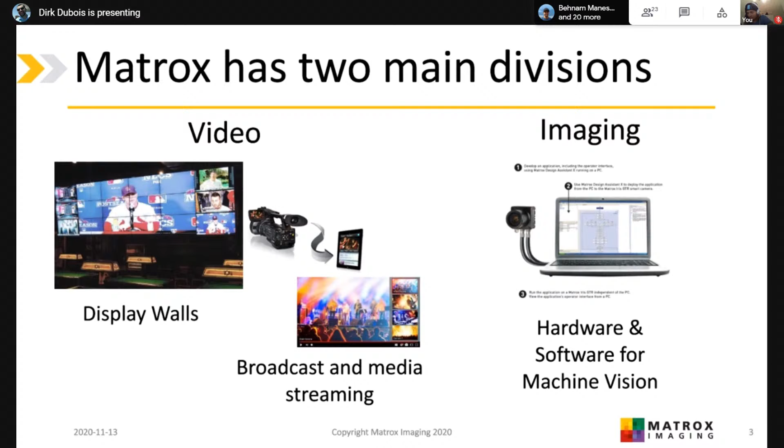But we're from imaging, so let's talk about imaging. In the imaging division, we do everything that's hardware and software for machine vision. So you have some sort of analysis you want to do of images, we provide the hardware and software to make that possible. And we've been around for about 40 years. Believe it or not, we're a Montreal-based company. Lorne Trottier is the founder of Matrox, along with Branko Matic. We're Montreal-based, all the engineering work and development and design gets done here, and most of the manufacturing gets done in Montreal too. We have our own assembly line, and we manufacture a lot of our hardware right here in Montreal.

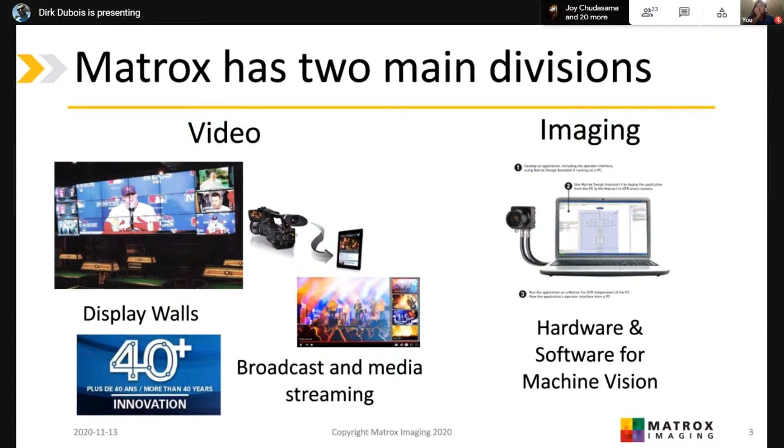So what is machine vision? Just to give you a bit of background, machine vision helps automate inspection. We want to do things like detect objects in images, we want to measure something in an image. Detection is great, you can find a piece, but once you've found a piece, often, if you want a robot to be able to come in and do something, you have to measure it, you have to know something about it. So how do we do that? Well, we provide this tool called MIL, the Matrox Imaging Library.

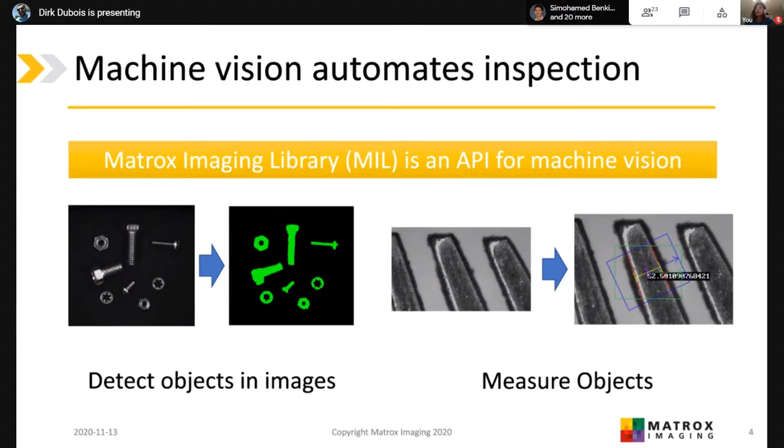It's a big API for machine vision. It's basically a software development kit that customers develop with, and they use it to code solutions for machine vision problems. And that's kind of what we develop. We've been doing that for a very long time. MIL's been around since 1991.

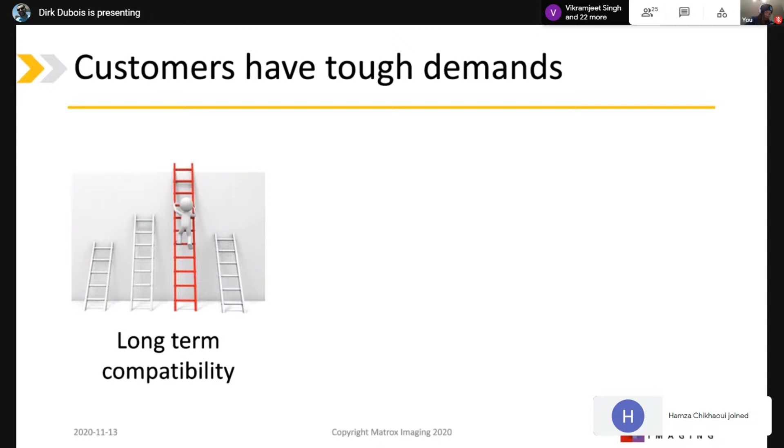So who are our customers, and what do they want? Well, they have really tough demands. Our customers really are looking for long-term compatibility, software that will be around and be stable and fulfill their needs for a long time, because they have these big projects that are going to be around for many, many years. So they need a lot of long-term compatibility.

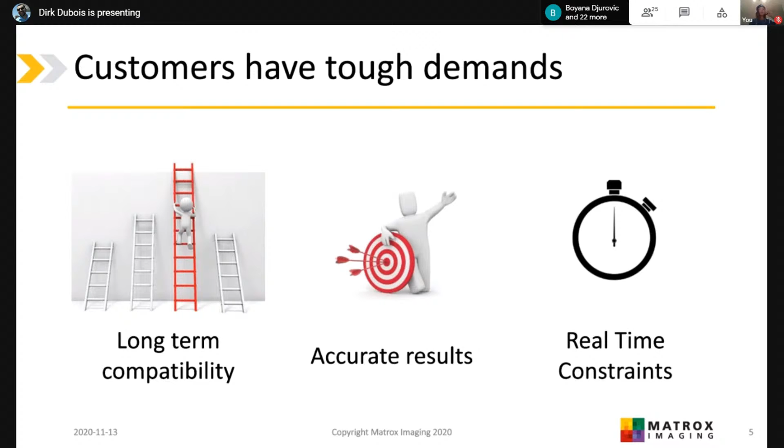They need really accurate results, because they have a factory floor somewhere where they're looking for parts, trying to pick up stuff. And everything that's missed is lost revenue, lost money. And they have real-time constraints. You have robots in the mix that have to pick and place parts, or some sort of biomedical scan. You have things that have to happen within a certain time delay.

Whoop, I feel like I missed a slide. Nope, there we go. Okay, cool.

And I will play this great video and hand it over to Behnam. Go ahead. Yeah, so some examples of what they explained to you.

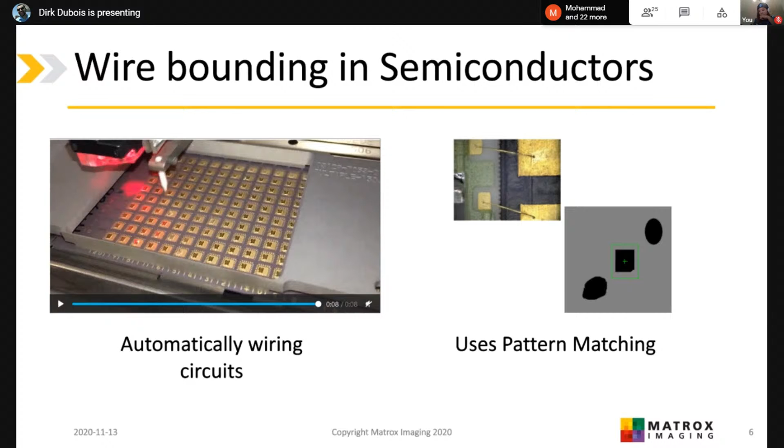Here you see a robot that is scanning the circuits and doing the wire bonding. There's a camera looking at the circuits, and it decides where to start and end the wiring. We have a tool called pattern matching, where you define a pattern, for example, the rectangular shape you see on the right side. Once you capture an image from the circuit, it searches the new image and locates that pattern. By knowing the location of that pattern, they can decide exactly where to start the wiring, and it gives you sub-pixel accuracy here, so it's pretty accurate.

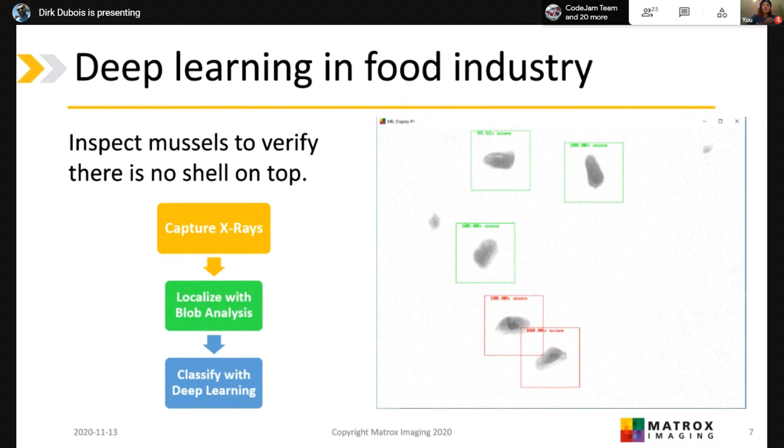To perform that, we first captured the images. Then we use our blob analysis tool, because our background is white and the objects are black, so we can easily distinguish the objects and locate them. Once we've located the objects, we crop them and train a deep learning neural network to learn the good and bad mussels and then predict them during production. We gained 98.6% accuracy after training the model, and our network actually works on CPU, with a prediction speed of about 1 millisecond per mussel or per box that you see.

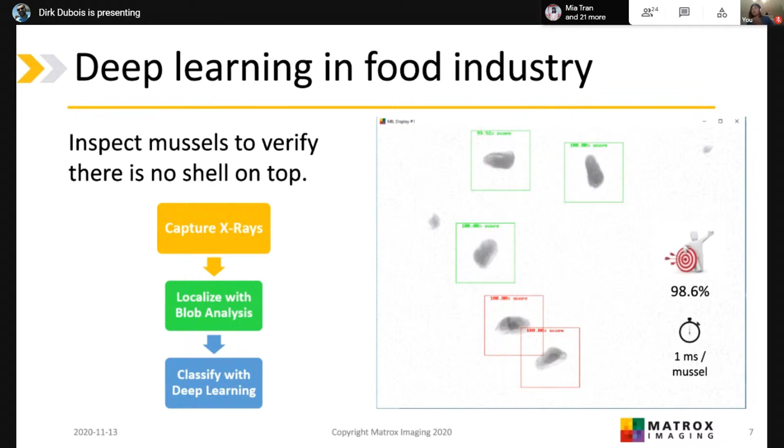Give it a second, it loads. Yeah, exactly. So here we're going to show you how to train one context to be able to learn and then predict if a mussel is good or bad.

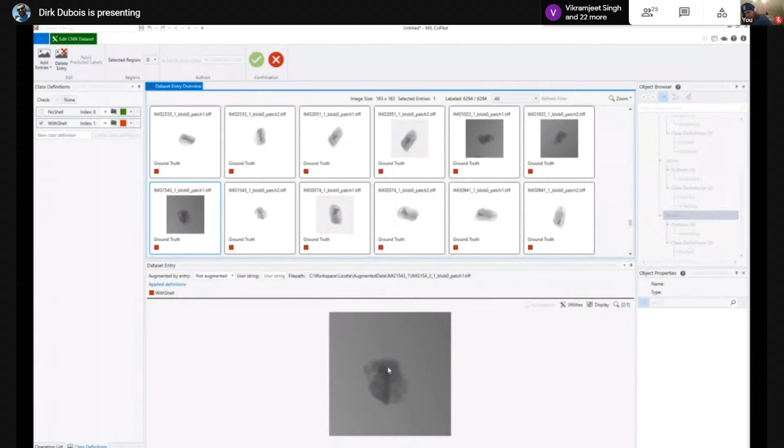We have a lot of images of the mussels labeled, so you see the green and red boxes under the images indicating if it's a good or bad image. We've also done augmentation, which is why you see some images darker, some brighter, with rotation and noise added, and smoothing, different types of operations to make the trained context more robust. You see this one has the darkest spot, so it's a bad one.

After we have the data set, we need to go and train our context. We give you parameters for training, like the learning rate and all of these. Here I'm changing the batch size because my GPU can handle it. Then you choose your context, your train set, and your dev set, and you just let it run easily.

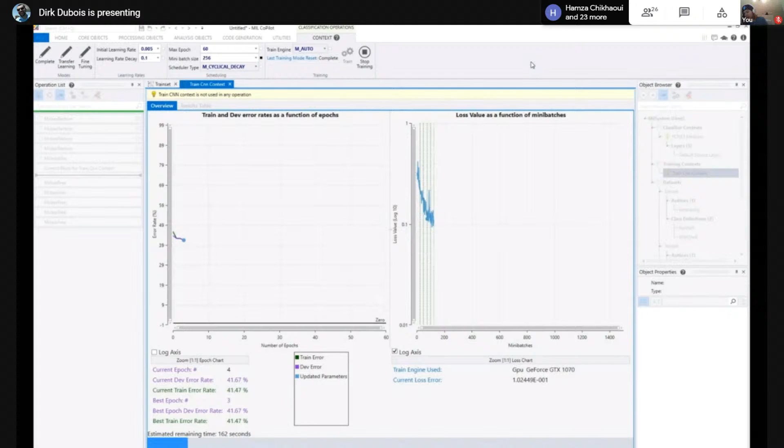Once you start the training, you will see two different plots, one on the left side and one on the right side. If you're familiar with deep learning, you know there is the loss value, which is our optimization error. That's what you see on the right side, and what we want to do is train our network to learn how to minimize this error.

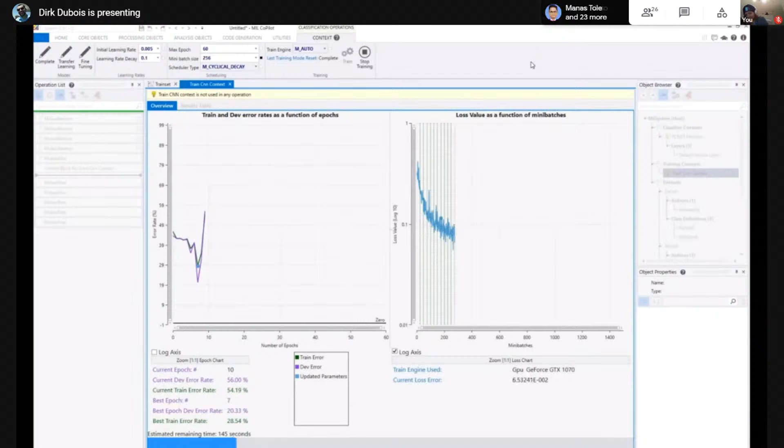What you see on the left side is the live feedback from the context to know if the train set and the dev set are giving us good results. So it's actually the error of our train set and dev set. We are choosing the best trained context during the epochs, so you don't need to worry about problems like overfitting that happen during training.

You can see here, for example, the current epoch is 15, but our best so far is 13, and it goes on over time. Since we are looking for accuracy of 90 to 100, or 95 to 100, it's better to switch to the logarithmic scale, so we have a better and more accurate visualization of how close we are to the goal. Since it takes time to train, we'll skip this part and go to where it's ready to use.

Yeah, there we go. Sorry about that.

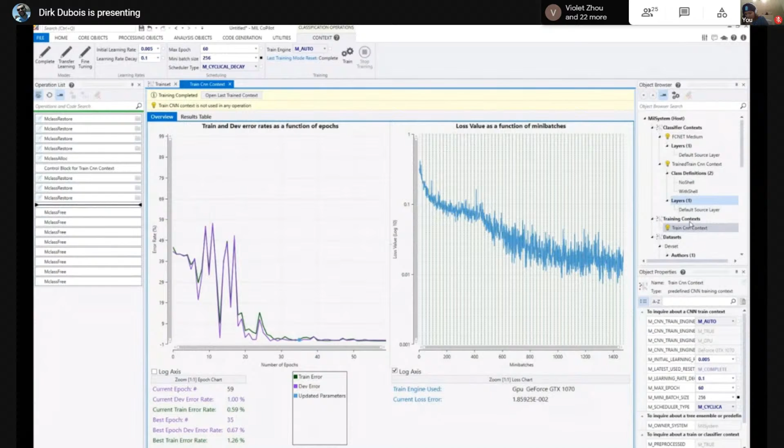No problem. So once the context is ready, we see that the slope is nice, starting high and going down. Then we have our test set, where we want to test if the trained context is good enough to deploy.

We predict on the test set using the trained context, and we have some analysis to do to see if it's good or bad. The tools we provide include some charts showing the ratio, and confusion matrices so you can see how it's behaving for each class.

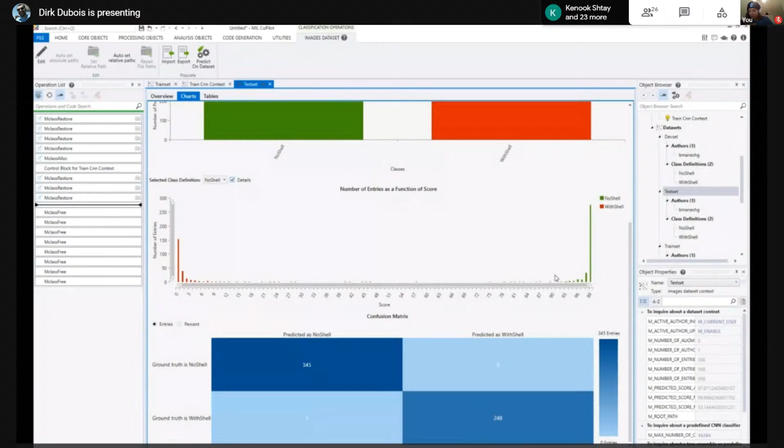There is also a chart showing the distribution of scores, like how many images were predicted with a score of 100%, how many with 90 to 50, or for other classes. You can get a quick visualization of the behavior.

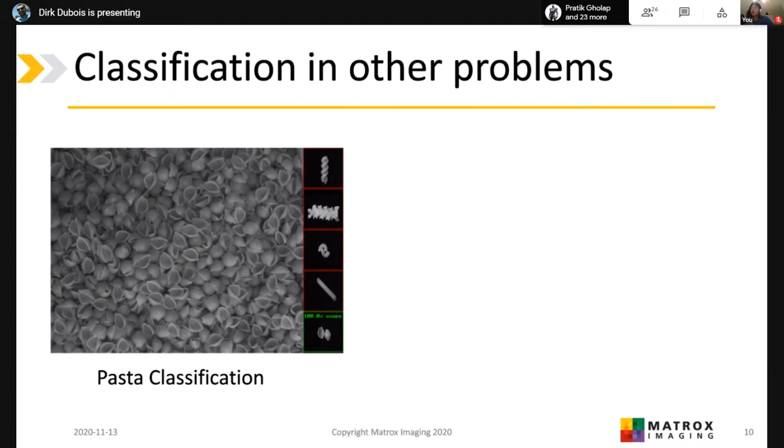We can also use deep learning for other problems. For example, pastas, once you look at them, don't have a specific pattern since they're mixing and always show a new pattern. So deep learning is a good tool to classify different types of pasta. Here we have images of pasta, and we can say which type we are looking at. The other example would be OCR.

We have a product with a string we want to read on top of it. We grab images and perform blob analysis again, just to locate the characters. Then we crop these characters and train a neural network to read them.

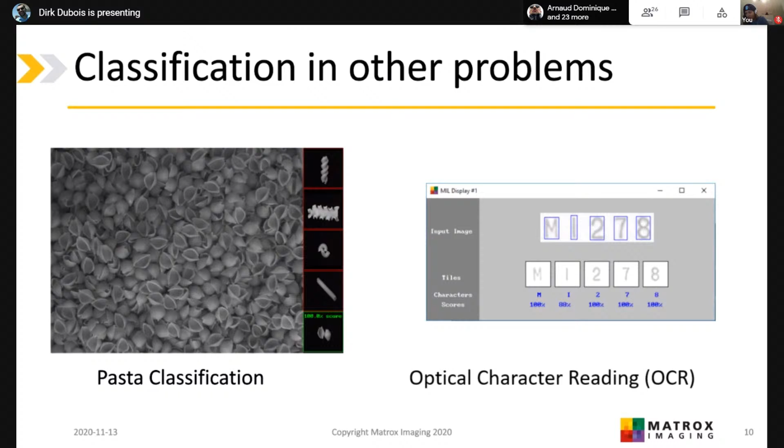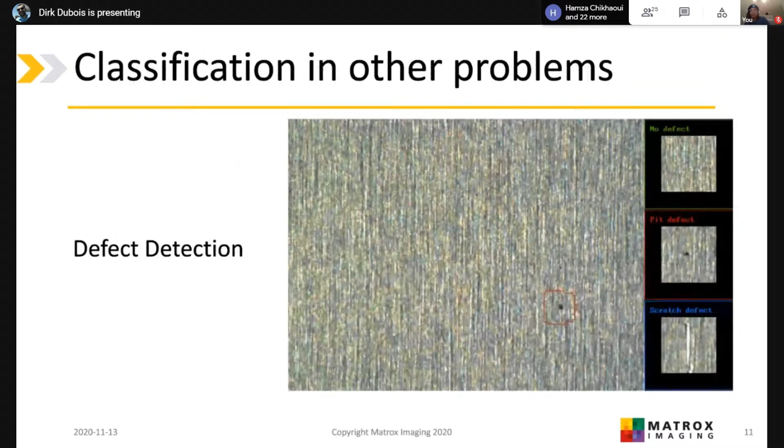The other example would be bin picking. What is bin picking? You have a bin full of products, and a robot that you want to take one product out of this bin and then place it into the right location.

For this purpose, we need a 3D camera, so we actually scan all the surface of the bin. We can also use the camera to capture a 3D model of the object. Once we define the model, we use our 3D matcher to match it with the best candidate. For example, in this video, the part on top is the best because it's closest to the camera, and the robot could easily grab it.

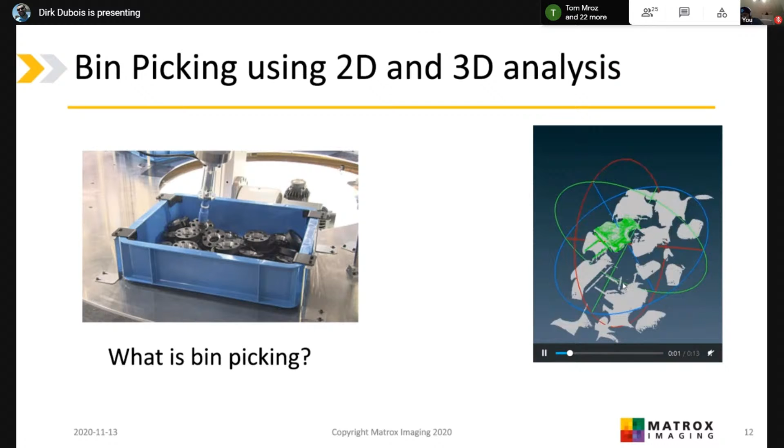So we've seen some examples now of how you can use classical vision and 3D analysis, and how you can use deep learning, and how we combine them together to solve a lot of customers' problems.

I think some of the caveats people think about when they think about machine vision today is that they think purely about deep learning models, about using exclusively deep learning to solve vision problems. The reality is, due to the high accuracy and performance requirements of customers, that's actually really tough to do with just deep learning models. There's this whole branch of classical machine vision that's been around since the 80s that has improved a lot over the years, which we can leverage to solve a lot of these problems.

And you saw that with the muscles example - we use blob analysis to help localize features we want to do some sort of deep learning with. So I guess what we're driving at is that we're really at the intersection of classic machine vision and deep learning, taking all the knowledge and industry expertise of classical machine vision and combining it to do other things.

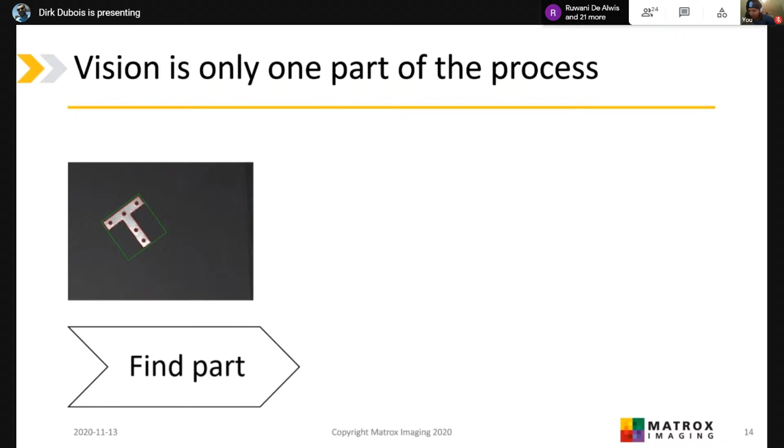So how do we actually meet high accuracy and performance requirements? Well, it's important to remember that vision's only one part of the process. You have an assembly line somewhere and you want to find a part. But once you find that part, you need to control a robot, which has to come in and move that part in some way. And then ultimately you have to assemble things - those parts are going to come together to make something.

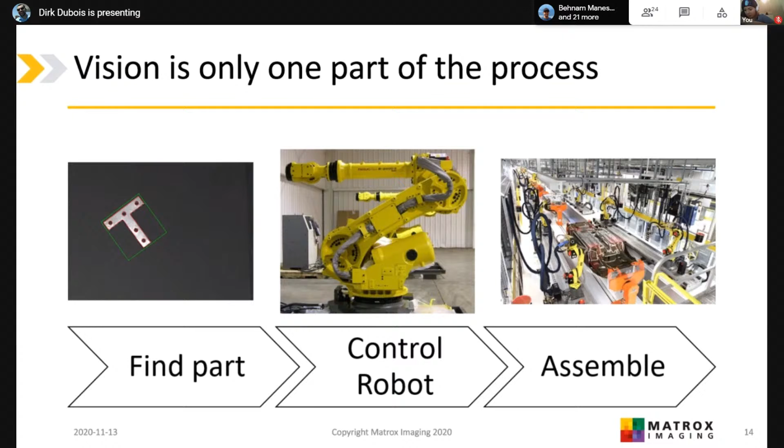The reality is that finding the part, that's the vision bit. Afterwards, you've got to control robots, assemble things, and all that takes a lot longer to do than finding the part. Finding the part is the algorithmic bit that we can really squeeze for time. So customers are really aware of that - every moment we save on vision, finding a part a few milliseconds or microseconds faster, means the robot has more time to do something, which means more parts processed, more things assembled. It's just a numbers game.

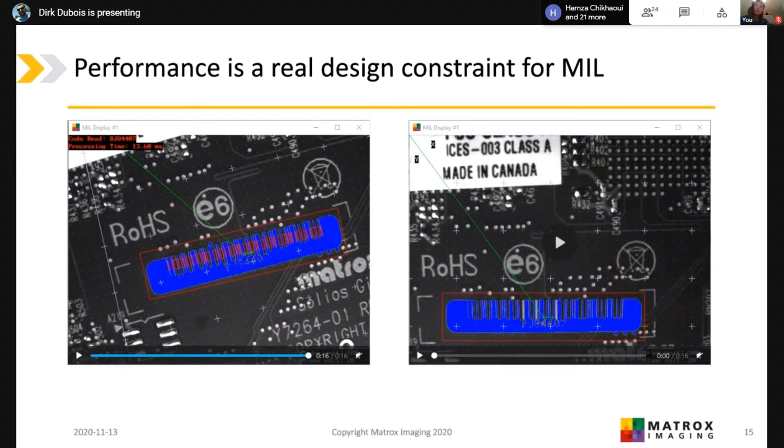So performance is a real design constraint when we make our library. On the left here we're doing barcode reading, which is really popular since lots of products have barcodes on them. In this example, it's a non-optimized standard run of barcode reading, and you can see from the timer in the upper left corner it takes something like 12, 13, 15 milliseconds to read it. You might say that's pretty good - if you're a user with a cell phone looking at a barcode, what's 12 milliseconds? But in an assembly context where vision's only part of it and you've got robots and things that have to come in, that's actually a really long time.

So what we do is have a whole optimization system where we optimize our algorithms and do the best we can to perform computations faster. The example on the right is the exact same example - the only difference is that we have our optimizations running. Now we can get things down to 2 or 3 milliseconds. And even that, I would say, for some MIL operations is very long. We have modules that run in the microsecond range.

These are running on general purpose computers, like ones you find at home, or even older equipment, because customers buy hardware from 10 years ago and they're still using it because it still works. So a lot of effort goes into making our algorithms work and trying to make them both accurate and performant.

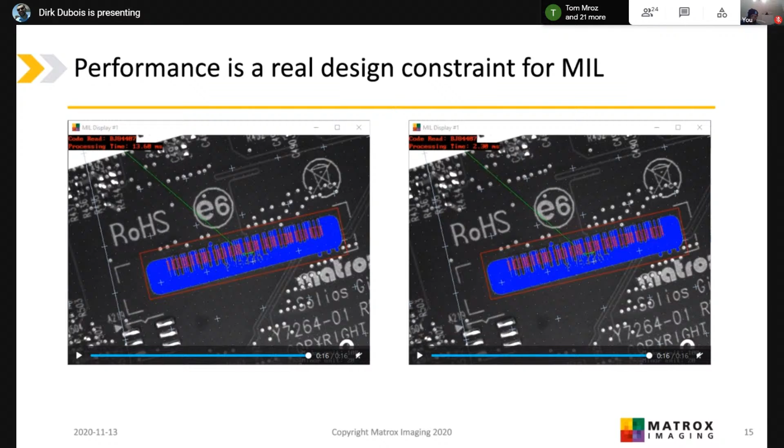So how do we actually do that? If I can hit next slide. Right, so an average time of 15 milliseconds versus 2 milliseconds when we go ahead and optimize. Also remember that our operations involve complex arithmetic.

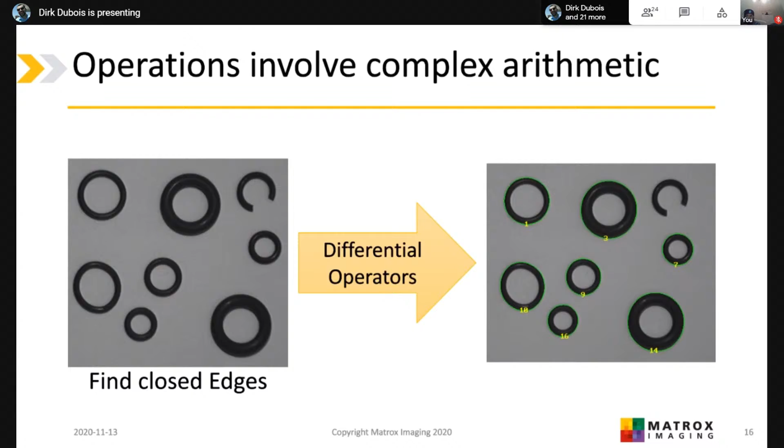So the cloud is not really available to us. When you're doing development, people have access to the internet. But I think in runtime, when people actually deploy these things to factories, a lot of these computers are networked, but not necessarily to the internet. So cloud computing is really not available.

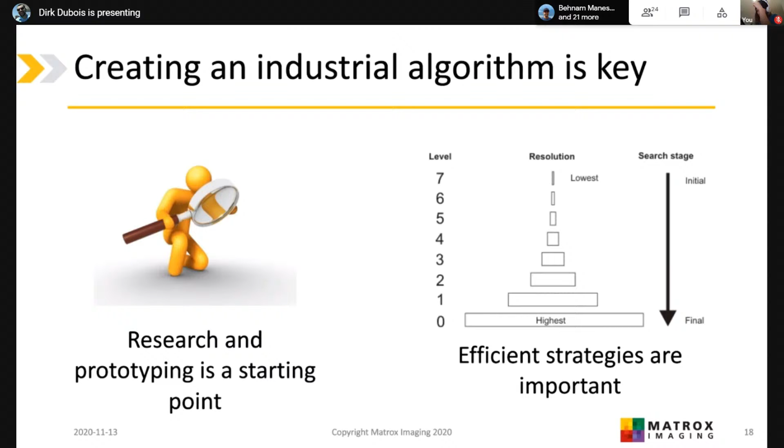So creating an industrial algorithm is key for us. A lot of work goes into research and prototyping as a starting point to try and figure out how do we actually solve this problem. Can we make a module or an algorithm that finds what we want to find, can read the barcode, for example? But then a lot of work goes into implementing efficient strategies to try and figure out what the best way is to speed up these algorithms and where to make good trade-offs in terms of speed versus performance and accuracy.

So for us, optimizations are essential for high performance. A lot of our library, actually all of our libraries, is coded in C, C++. I know deep learning is very popular in Python, and people do a lot of prototyping in Python, and that's great for prototyping. But when it comes to actual industrial grade code, we actually do our implementations in C++. All of our algorithms use multi-core when possible, so they're using multiprocessing, multi-core in an attempt to speed up and parallelize as much of the work as it can, so it can be more efficient and fast.

And how do we do that? Well, we do a lot of optimization work too. We leverage things like special CPU instructions like AVX and SSE and all these different chip features that your CPU has that are usually used for multimedia. We leverage a lot of that to optimize these algorithms and really make things performant, as I showed you before.

And so that leads to this concept of intrinsics that you'll probably never hear about in school, but you'll hear here, and hopefully you'll think it's interesting. Intrinsics allow for this tailored behavior. They're what we call compiler built-ins, so that's why we like to be in C++, in C. What they do is they map to special CPU features, exposing special functionality of the chips that let us do all these multimedia instructions like SSE, MMX, etc. They basically provide assembly-like functionality, but in C++ for us, where we don't have to write assembler code, because I'm sure all of you had to do that for a course at one point. I never want to do that again.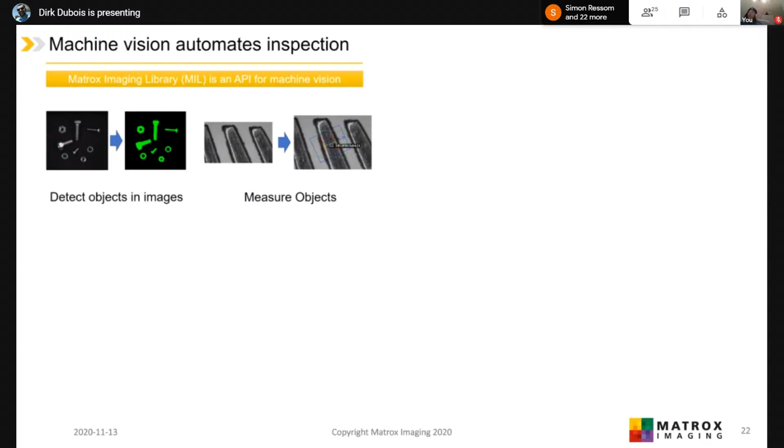So to briefly recap on what we saw: what's machine vision? It helps us automate inspection. It doesn't just have to be deep learning, it can be all these other classical techniques too, and we can marry them together and make something cool. Deep learning can really solve a lot of interesting problems where classic machine vision gets stuck. We can only go so far, so we can find the mussel, but we can't tell you if it's good or bad. Well, that's a great marriage of classic machine vision and deep learning.

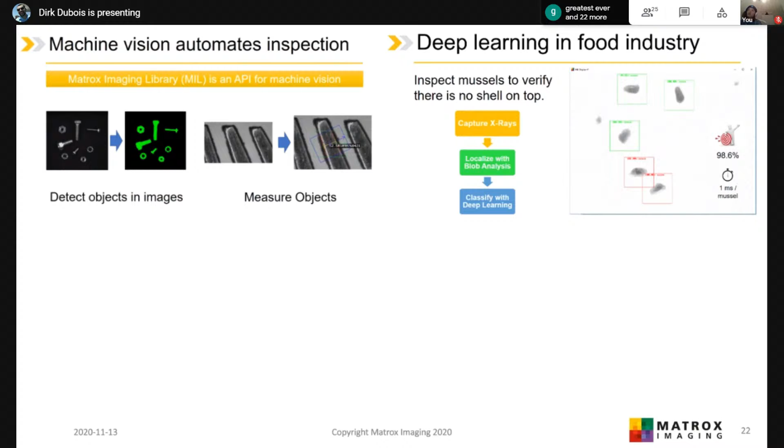Operations are complicated and often involve differential operators and all these deep things. We have to think about what that means for our application, and what that means for the real world runtime of these things when we actually put them together. And then we talked a bit about intrinsics and how that actually allows us to make industrial code and put things together.

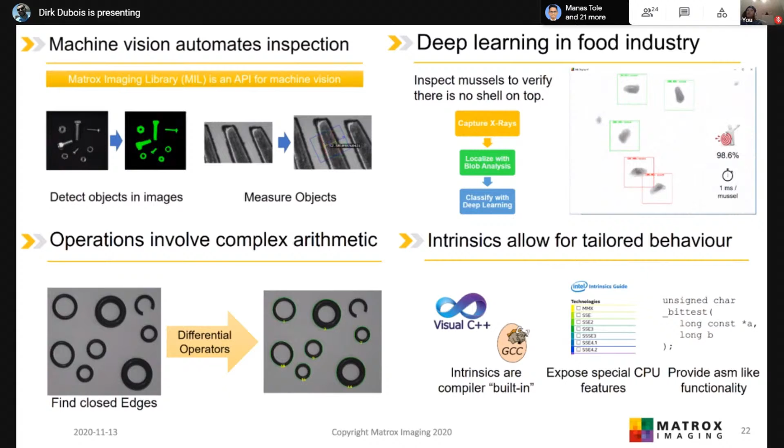Yep, I believe someone is still sitting in the Discord, so if you have questions about the challenges, you can see that there. Benham can correct me if I'm wrong, but we do provide you with an installation of MIL, which comes with Copilot, that UI you saw, where you can label images and do training. We do our best to provide easy tools for our customers who want to put them all together, so feel free to leverage that to solve any vision problem you're trying to do. I mean, clearly ours is for vision, so if you're trying to do natural language processing or something, you're out of luck. But if you want to label images and then train a model and classify, we do that, no problem.